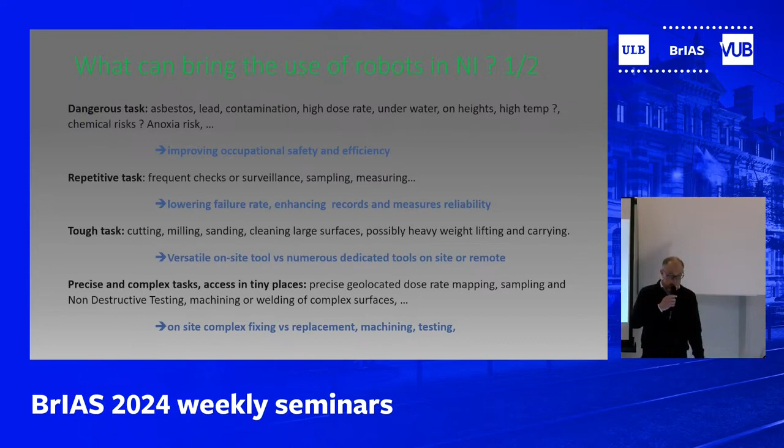Robotics is also a way to face the oncoming lack of resources. It's now quite difficult to find the workforce resources we need, and we know that in the future we'll be lacking resources. A key point could be to make jobs and companies more attractive, and having high tech like robots on board could do that. In some cases we won't find the staff, and we know that some tasks could easily be done by robots, so robots could replace staff companies can't recruit.

Robots have improved in recent years. They are now versatile, easier every day to program, and more affordable. Low code, no code solutions are coming, making it easy to fix or modify. This means a company can get a robot, adapt it, use it, adapt it again, and use it for another task. This helps companies be competitive and adaptive to the high demand in the nuclear area. On top of that, we have AI that will provide additional autonomous and adaptive performances and uses, which I won't develop here.

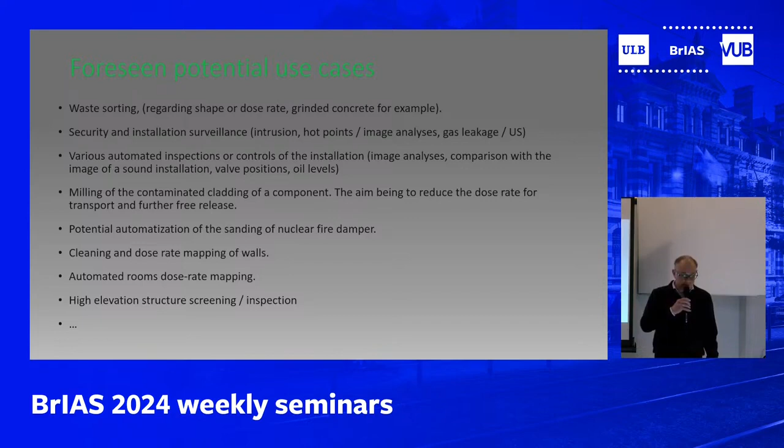This is all for me. If you have any questions, I will be happy to try to answer.

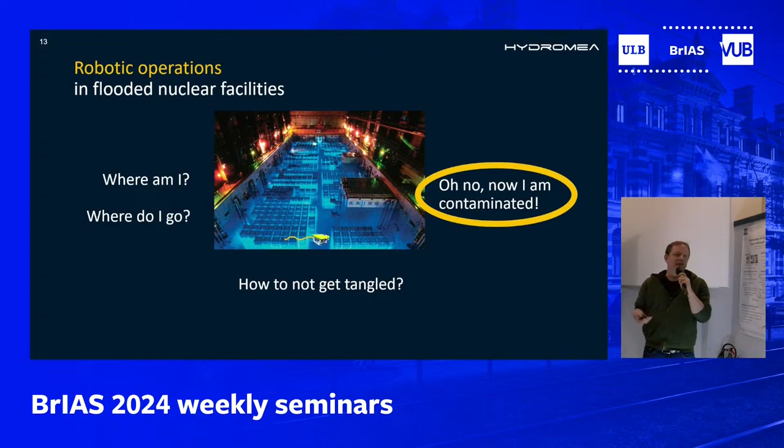So the second issue, how to avoid the decontamination. Well, there's a fairly straightforward approach to that. What if your robot just never leaves the water? Then you just never have to clean it up. And the very natural progression is that you give it an underwater garage in which it parks and recharges. We have actually developed this for an aquaculture project.

The idea is, within a net, within any of these large aquaculture nets that are more and more going offshore, you have a robot sitting inside that inspects the nets, inspects the fish for diseases, and the robot essentially just lives there and then comes back to the garage to recharge.

So for that, we actually did develop this parking solution. The nice thing nowadays is that things like inductive charging for underwater robots are sort of becoming an off-the-shelf product, so that is a mostly solved problem. The other nice thing is that you can offload data even faster than through the optical link. So a convenient thing to do then is some automatic docking.

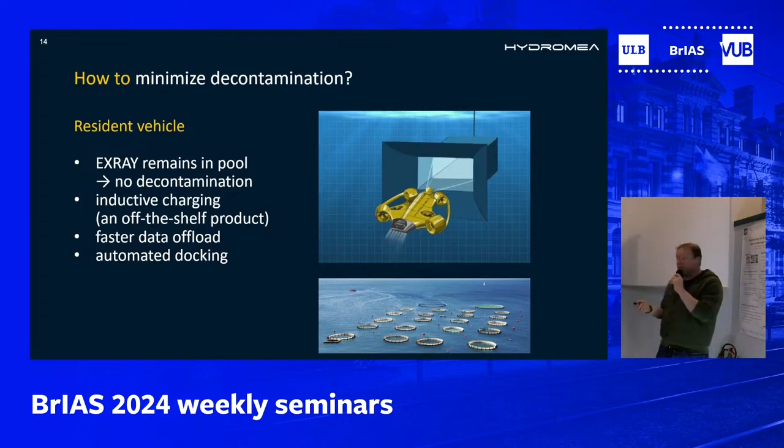Again, there are various academic projects around the world that work on automatic docking in all sorts of fashion, be it in space, on land, or underwater. But of course, we leverage research that has been done before, but ultimately we do have to implement it in our robot.

So what you see here on the left side is a mock garage, a cage that is in our pool. And what you see here is the video of the camera of the robot that looks at 4 fiducials. And from those fiducials, it tries to estimate its position relative to the garage. And you see its pose estimate in the lower right corner.

So if I start it now, here, it's not docking autonomously yet. Just my colleague is driving it around, just to see how well it can track its relative position with respect to the cage. Because once you do have your relative position to the cage, that is when you then start implementing any sort of auto-docking maneuvers. So that is something that is very much in development.

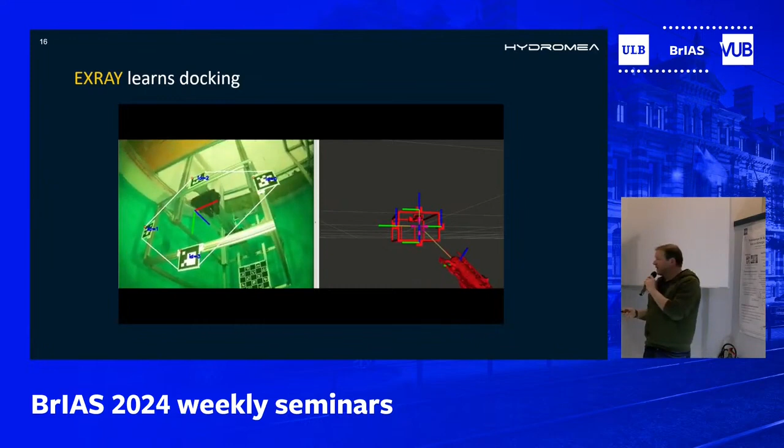And this also reflects a bit the course of our company. We did start in a fairly hardware-intense setup developing our robot, but the side of our company that now grows fastest is certainly the software side. So anything related to image processing, mapping, the SLAM as it's called, or just robotics software in general, that is actually the fastest growing, and that's where most of our time is invested.

And the last question, where am I and where do I need to go? So what is literally called SLAM, simultaneous localization and mapping, is key in a place like this, where the furniture, so to say, changes on a regular basis. So even if you had it all mapped out to begin with, this map doesn't help you much if stuff has been moved around. So you, as a robot moving in there, should constantly reassess the map, localize yourself, find out what has changed.

And there's an enormous body of academic work that has been done in that regard in the past 20 years, and I was involved in part of that. And we are now actually putting this to good use to come up with auto mapping capabilities of our robot. Because ultimately, our company started with AUVs. We now went to remotely operated inspection vehicles. But the ultimate goal is, of course, to come back to an autonomous inspection drone. The industry that we work in, oil and gas, or potentially nuclear, they are, for good reasons, very conservative.

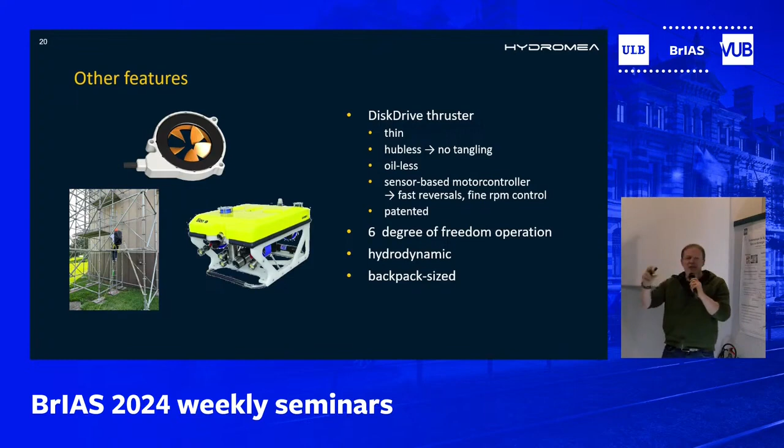Let's not forget, our competition — 95% of all other inspection robots literally look like this box. The standard thing: you have this frame, and you screw your stuff into the frame. This isn't some laboratory hack; these are multi-million-dollar products actually sold to you. It's very functional, but not particularly hydrodynamic. So for efficient, battery-efficient inspection, it's not very suitable. Things like having just a flat thruster make all the difference, because suddenly you get a much sleeker vehicle, and that's not just for the good looks — it reduces drag, reduces battery consumption, and extends range while keeping the size the same.

And of course, it ultimately makes for a backpack-sized vehicle if you carry it into more remote spaces. So that concludes my presentation.

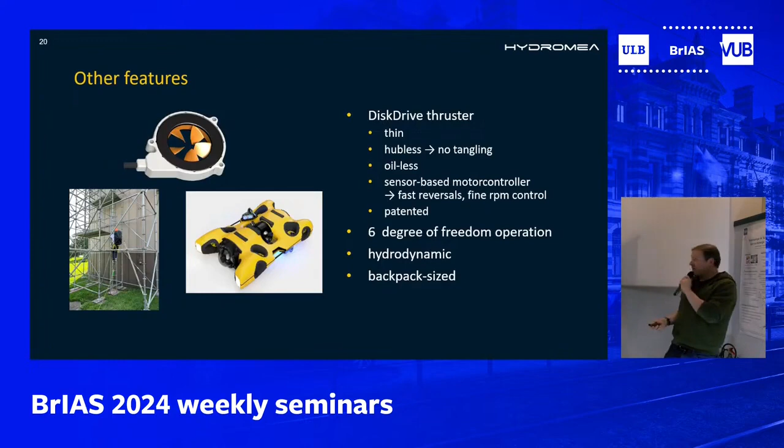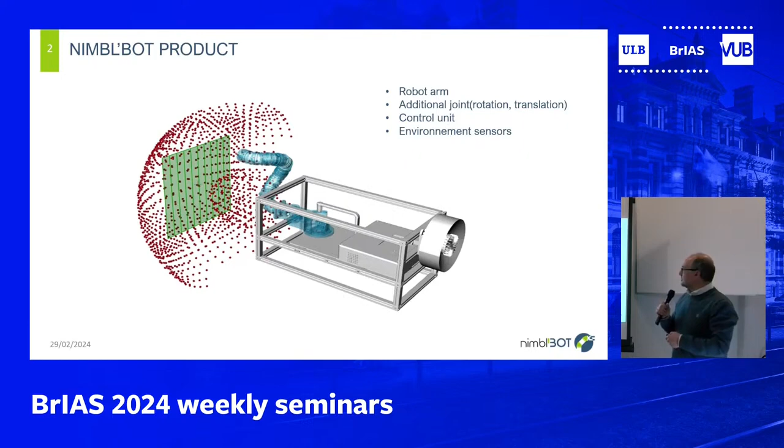Nimbl'bot is the contraction of two words, nimble and robot. That means we are producing agile robots for industry. Our robot is in blue in the picture. As you can see, there is an arm here with an added joint to increase the space of work, and we also have a control unit and sensors required to pilot and control the robot.

We design and manufacture a compact robotic arm to perform inspection and maintenance. Our design is based on a new architecture of actuators, which are more rigid, hollow, and torsion-free. This enables us, when we use this robot with a vector, to operate in environments with high constraint in space or hazardous conditions. We can do this operation because of the agility of the robot and its capacity to be easily piloted.

As we have discussed till now, we have a lot of questions about the safety of our infrastructure, especially because we have old infrastructure and we have to make more and more control on it. We have to increase the safety of the workers, and that means we need to find solutions to make more tests in conditions that we have not defined when we launched the design of the facilities.

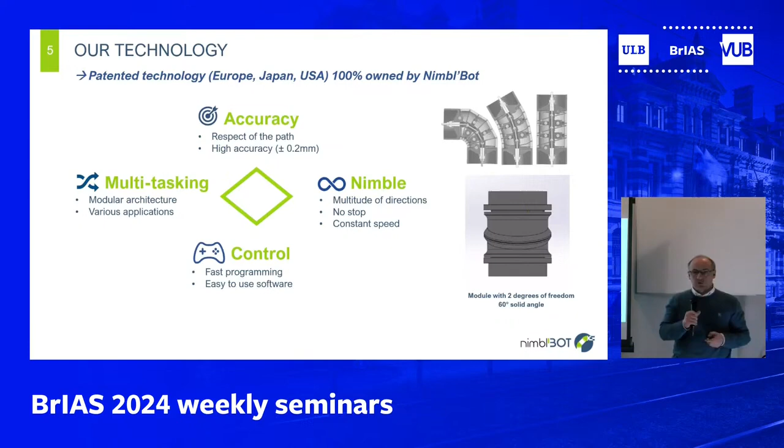We have also designed a lot of software to control these robots. To explain how it works, the technology is composed of a module with two degrees of freedom. The first one is a rotation from the green tube compared to the yellow platform, and the second one is the rotation of the blue tubes with the orange platform.

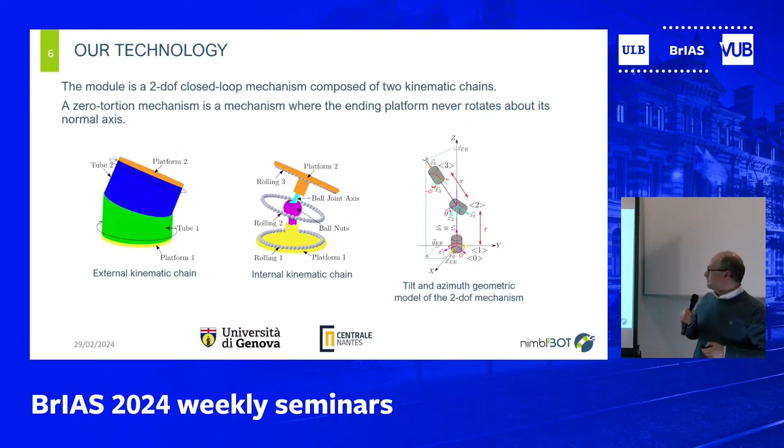It's a closed loop mechanism. That means we have an internal kinematic chain inside with a ball nut, which gives the property of no torsion. We can modelize our robot with a tilt-azimuth geometric model with two degrees of freedom. The space of work of this robot is part of a sphere, and we have two singularities, one in the center of this area and one at the border.

We have also something special: in the joint space area, we have two aspects which enable us to have the same space of work. When we use a lot of modules, we obtain a redundant mechanism. This offers opportunities for us, like obstacle avoidance. We can work in confined areas, and we can share space for two robots in parallel.

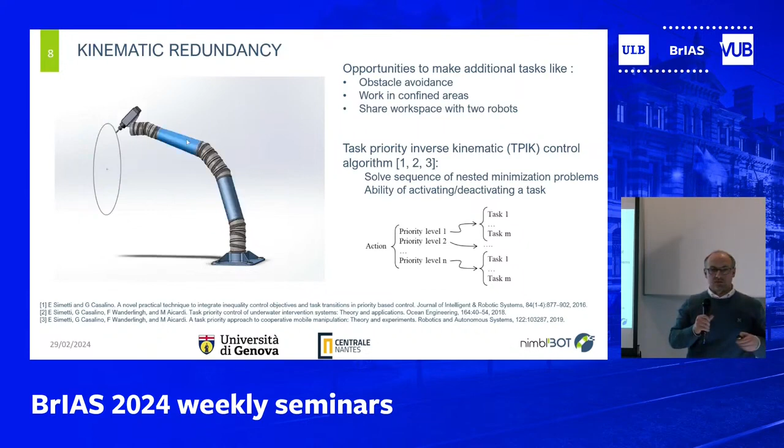To control these robots, we have developed an algorithm based on task priority inverse kinematic control. This work has been done with the DIBRIS department from University of Genoa and Centrale Nantes. The TPIK algorithm works with actions defined by different tasks, and for each task we define a priority. It's an optimization problem to obtain the good solution for the robots.

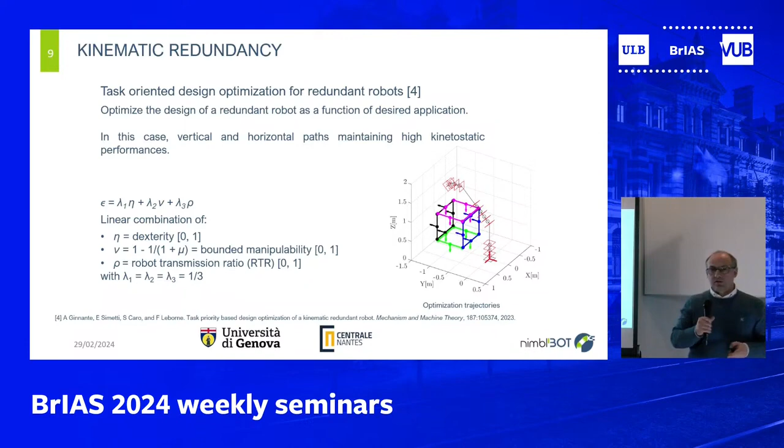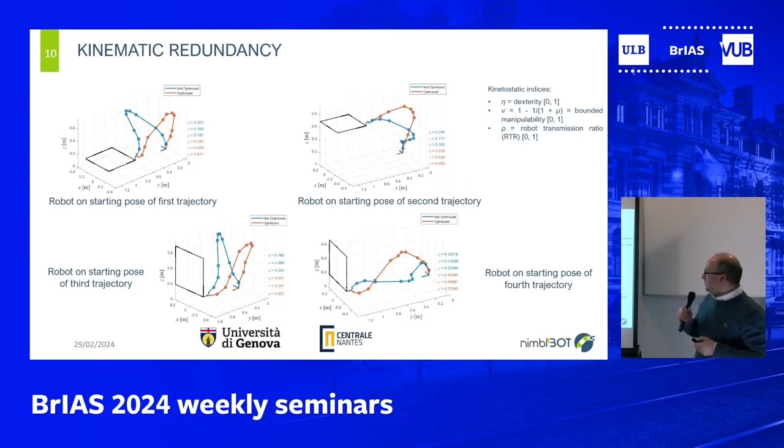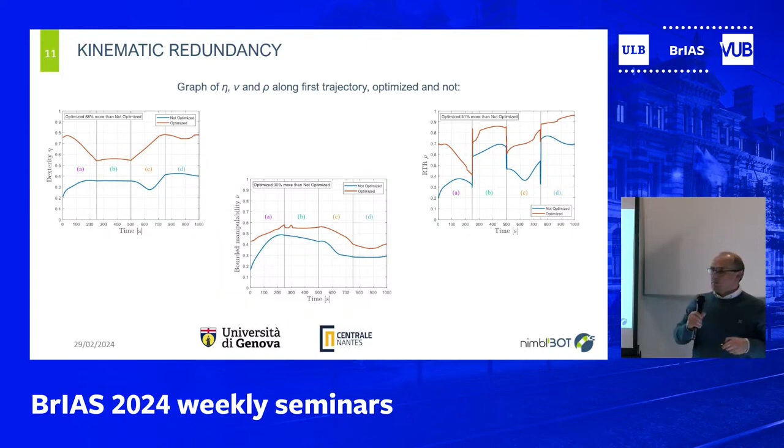We can also add other constraints, meaning we can optimize the shape of the robots by introducing parameters for the size of the robot. For example, when we want to follow the border of a cube, we can optimize the robot using three parameters: dexterity, manipulability, and the robot transmission ratio. The result we obtain shows in red the optimized shape of the robot, and in blue the standard, initial shape of the robot. We can see in that picture the gain we obtain in manipulability or dexterity by modifying the shape of the robot to perform the same task.

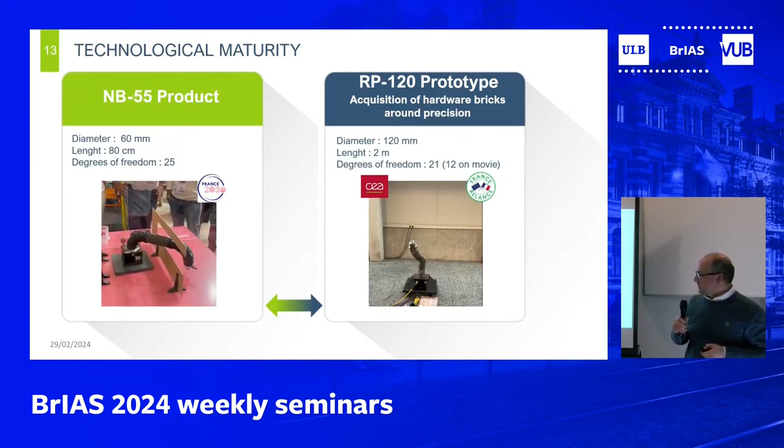For the hardware side of the robot, we have designed two products for inspection and maintenance. The robot for inspection is the NB55, 60 millimeters in diameter, 80 centimeters long. In the demonstration, we can introduce the robot inside the window and place the camera to make a straight line beside an obstacle. That kind of movement cannot be easily made with another kind of robot.

In the second step, we are working on a bigger robot with exactly the same design and algorithm. It's just heavier hardware to perform maintenance tasks. It's the prototype version, and we are carrying on working on it.

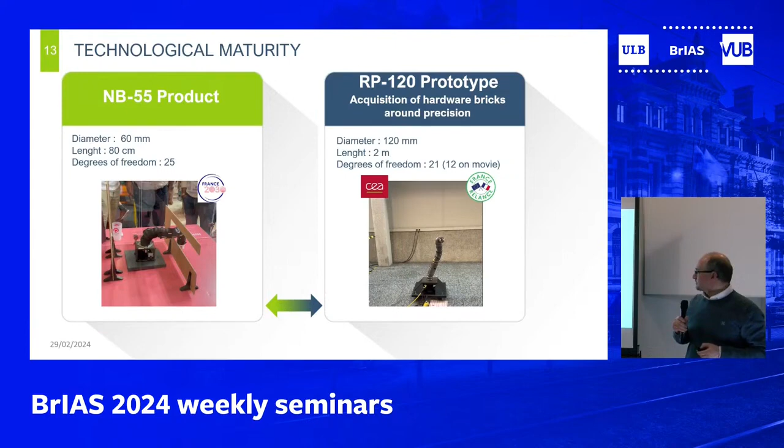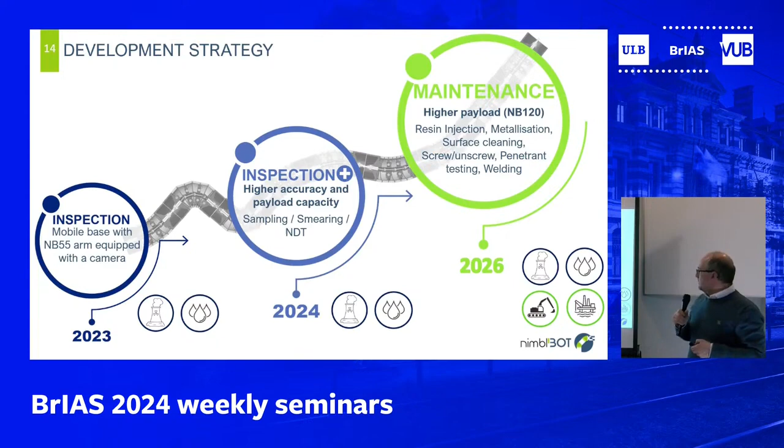Our development starts from the small robot. We are doing inspection with camera at the moment, and little by little we are implementing new features. We are implementing NDT control, and we are working on a gripper to pick parts with the small robots. The bigger robot for maintenance is scheduled for two years later.

Our robot is light compared to others. It can be used for mobile or fixed applications, and we can easily connect the robot with different actuators and effectors, because all the development is made with ROS.

We have two other ways to control the robot, specifically designed for inspection and NDT. The first one uses Cartesian control, as you can see on that movie.

On that movie, the additional joint is a rotation. We have defined in the space a path for the end effector of the robot. The robot will go to the beginning of this path, and after that the camera will follow the path we have programmed. The objective here is to make a check of weld on a pipe.

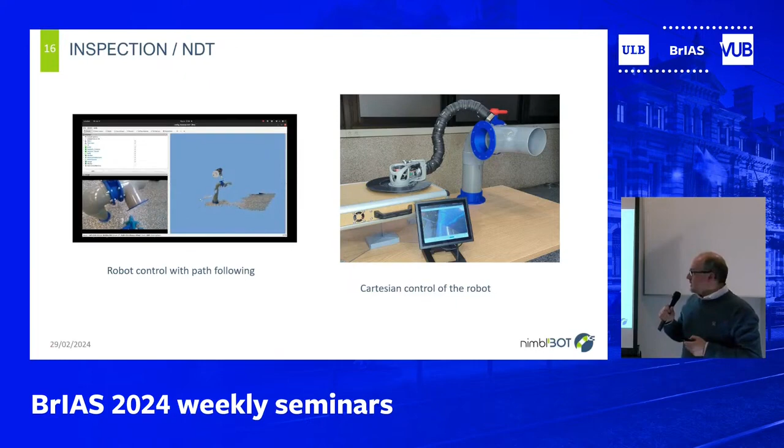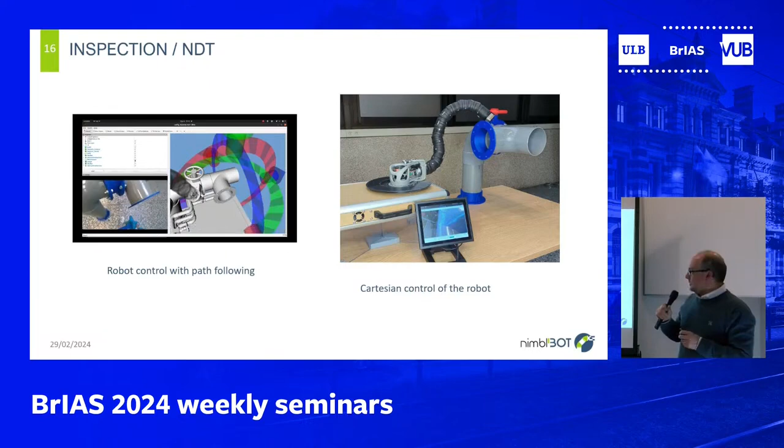The camera is RGBD, meaning we have point cloud acquisition. This enables us to introduce the CAD model of the installation and move it to fit with the point cloud. As soon as we have sufficient localization of the point cloud against the CAD model, we can work with the CAD model to follow the path and avoid obstacles existing in the area, obstacles we cannot see with the camera.

Oh, thank you. Not yet, my microphone. Okay. Yes, we do.

Thank you very much, Ludovic, that was really interesting. One thing that struck me is that you have many joints or moving parts, so intuitively that would increase the risk of one of them getting stuck.

But then, as that crossed my head, you started talking about kinematic redundancy. Is that something you explored in one of your scenarios? If one of the joints is blocked, can we still perform the task, and how efficiently can we do it?

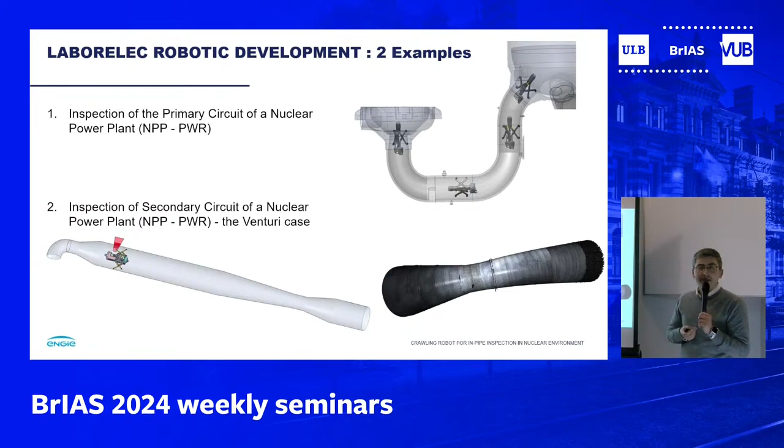Let me give you two examples of our activities. The first is an inspection of the primary circuit in a nuclear power plant - we are talking about PWR. The second is for the secondary circuit, and that's what I call the Venturi case. I will also try to address a few points already touched on today, and give my personal feeling, for instance, on the amount of documentation needed for such interventions. First, for those working in the nuclear sector, they might recognize the primary circuit - it looks something like this.

The mission that was given to us was to design a robot which was able to do the inspection of the primary loop, not a full primary loop, but part of it, to also do operations - grinding, cleaning, radiography, NDT testing, ultrasonic, particle PT testing - and to do it in an environment which is the primary circuit. So we are talking about a highly contaminated environment. The primary circuit is really the pipe that goes around the reactor.

So here you see the design. That's the steam generator, the primary pump. Those were the two points of access for the primary circuit.

Normally, from the steam generator, you have what is called the manhole. It's about 450 millimeters in diameter, but the primary circuit itself goes up to 800 millimeters. These are big pipes.

The capability of moving a robot which has not only to do inspection, but also to do operations in elbows like these, and also the capability to inspect and report with precision for the NDT in the region of 1 millimeter - so here, these are more or less the summary of the requirements.

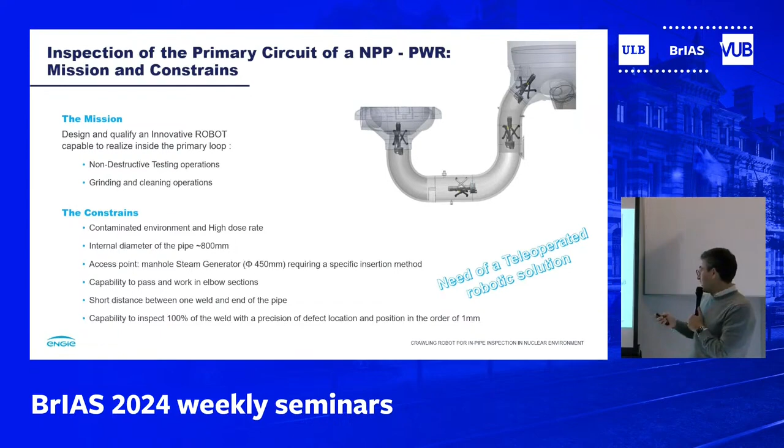Then we come up with this solution, this proposition. Just to be clear, we do not produce robots, but we are more an integrator of solutions, the best available on the market. We participate in this step: the conception phase, the development, the qualification, and the trainings if needed.

For this project, for instance, it was needed. The conception phase is really the phase where we go to the requirements, to the possible solutions on the market, nuclear or non-nuclear, everything which is available. What has to be co-designed, maybe with partners, we do it.

And then there is the development phase. We also do all the development tests, so the factory acceptance test of the robot, the development tests that need to be done in order to fulfill the requirements of the power plant.

And in this particular application, if I go back to the requirements in terms of documents, the qualification phase is huge. So here you need to account maybe 6 months of qualification for a robot like this. And then there is the training of the operators.

Now, if I go back to the difference between nuclear and non-nuclear robots, the high dose - it doesn't impact the robot itself. The problem is that when you need to inspect and do NDT and radiography, this is the big issue.

The radiographic module - the robot was conceived in order to have a main crawling system with different modules, and there was one module dedicated to radiography. Then you need to protect the robot itself, to harden the system in order to be able to withstand these types of activities, the radiographic testing. The source is so powerful that it can destroy everything. So it was designed actually for the dose given by this inspection, not for the high dose of the pipe, of the circuit.

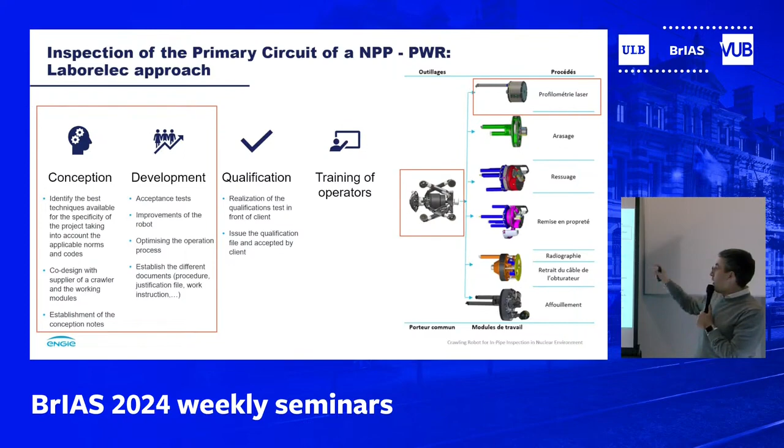So the project is huge, so I will only concentrate on a few topics today: conception and development on one module, the profilometry, laser profilometry module.

So this is a bit how it looks like in reality. So it's a module - the idea was, okay, we have one crawling system, it goes in and out, then we only remove the front part and we adapt it for the different types of inspection.

The laser profilometry module was designed by me. This was my module, that's why I selected it, together with a contractor. It's a module that has 2 cameras, radial cameras, one front camera for navigation, and then there is a laser for laser triangulation.

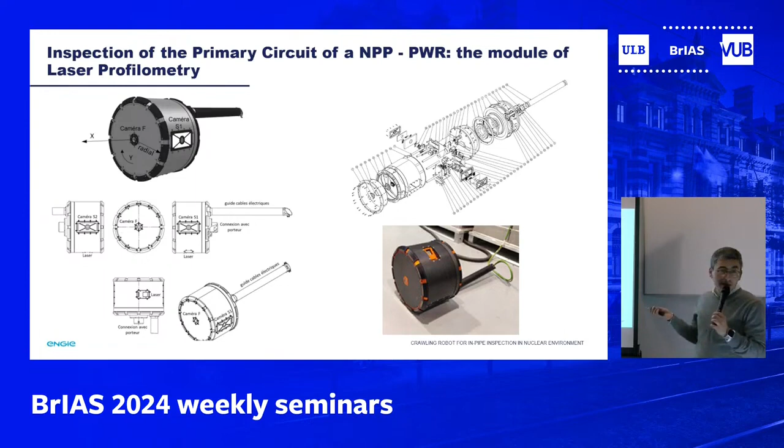So that's a bit of the design phase. This is the list of parts and materials that has to be checked in order to be compliant. That's for one module.

I'll also give you more detail of the technology used in this case. The requirement was to inspect the welds, which are done automatically with the robot. After welding, you need to inspect the root penetration. If there is any lack of fusion, we had to grind the root penetration and re-inspect the pipe and weld to make sure we didn't grind too much, since we didn't want to remove too much material because the wall thickness is defined. So we had to check that.

How we did it with this module was laser profilometry, a laser triangulation technique. If you have a laser beam like this, you can measure normally in this range. Here's the schematic, depending on the positioning of the robot inside the pipe and the diameter of the pipe. You can measure the distance between the internal wall and the system, with a repeatability of 100 microns with this system. You can go lower if needed, but in this case it was enough.

And then you have the camera. These systems are synchronized together. You might have noticed in the previous slides that they are physically not looking at the same location—they are in a configuration 90 degrees from one another. But at the end, there is software that synchronizes everything, images and laser profiles, laser clouds, in order to give one output.

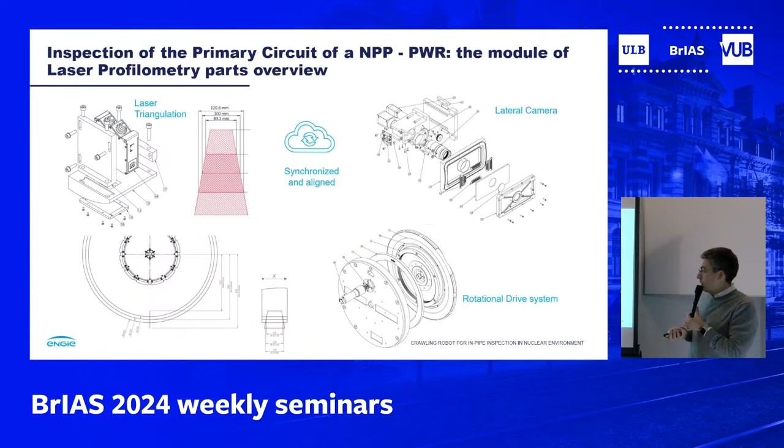At the end, what you need to estimate is how the welding was, whether it was okay or not, and whether there's any lack of penetration. Then after you grind it, you also have to estimate how much material has been removed. That was one of the requirements for the module.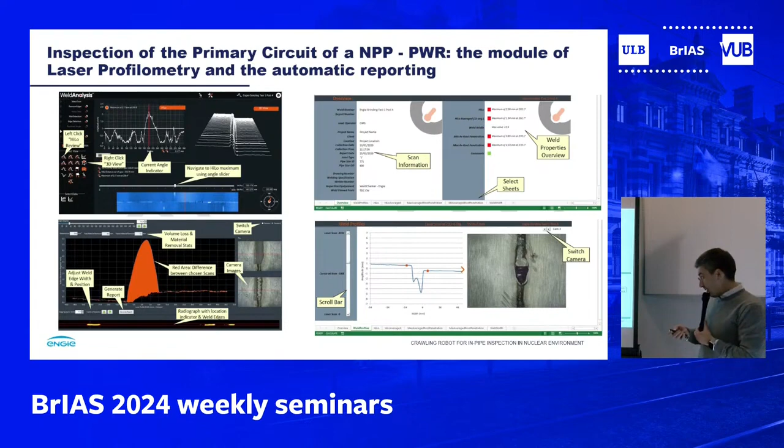This was a big project with a lot of development and qualification, not only for the mechanical part but also for the software—you need to prove that the software is also reliable. In this case, we also decided to go together with our partner for automatic reporting, so the report is automatically generated at the end of each inspection. That's an example of a big project.

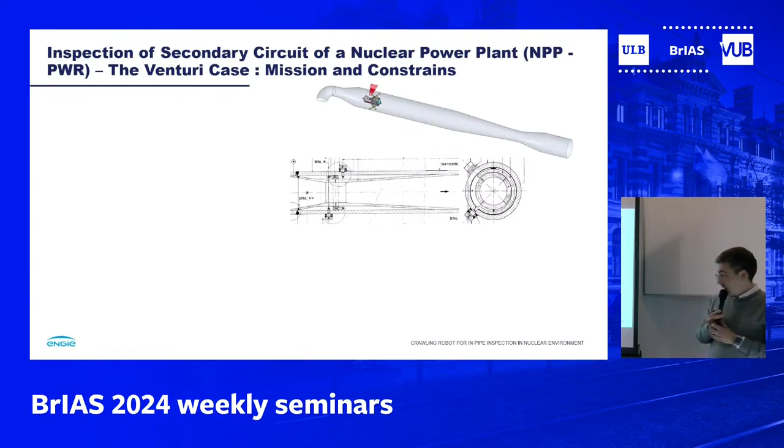And now I'll go to a different topic: the inspection of the Venturi pipe in a nuclear power plant, but on the secondary circuit. In this case, we are not talking about a contaminated pipe—the environment is not radiating, you can stay there. But the pipe looks something like this, a Venturi system. I'll put up the requirements and then explain.

In reality, the Venturi is a convergent-divergent pipe, which is a pipe inside another pipe. To access it, you have some tubes around it—it's used as a flow meter. With this device, you can measure the flow, and with the flow and pressure controls, you get an idea of the power produced by the reactor.

The problem in this case was a drift of pressure, which you could actually regulate by adjusting the power and the flux to solve the issue. But during the shutdown, we were asked what's the cause. They were thinking about possible erosion - if you have erosion in this area, then the flux changes and you have a drift, or any leakages that could happen.

We are talking about problems with the insertion point. It was a valve, very small, 208 millimeters, then the pipe went up to 400 millimeters. The pipe of the Venturi is not a cylindrical pipe, it's a convergent divergent pipe, so the manipulation was a bit more tricky. We wanted to evaluate the possible erosion compared to the CAD using laser scanning.

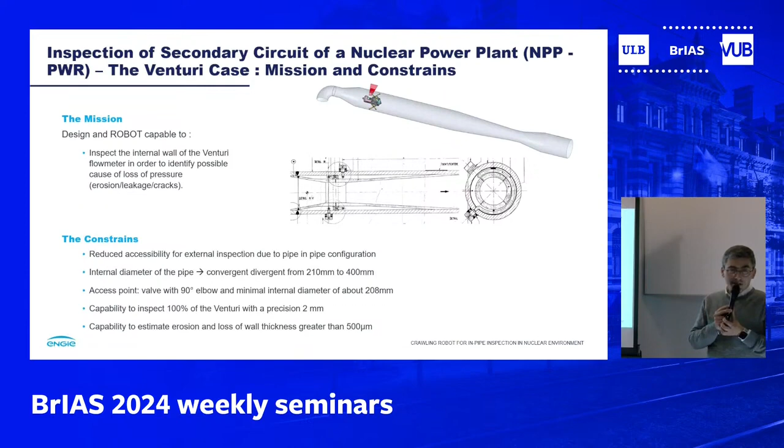Profilometry with a resolution of more or less 500 microns. The problem again with the CAD comparison is that the CAD is the CAD, but the as-built is something different, so you will probably see later on.

So again, this was teleoperated, but in this case, having a robot teleoperated remotely was not given by any need for contamination or radiation protection. We could stand close to the Venturi, but this is how the Venturi looks like - it's a pipe, and inside this pipe there is the Venturi. If you want to dismount everything and change it, it costs more or less €1 million.

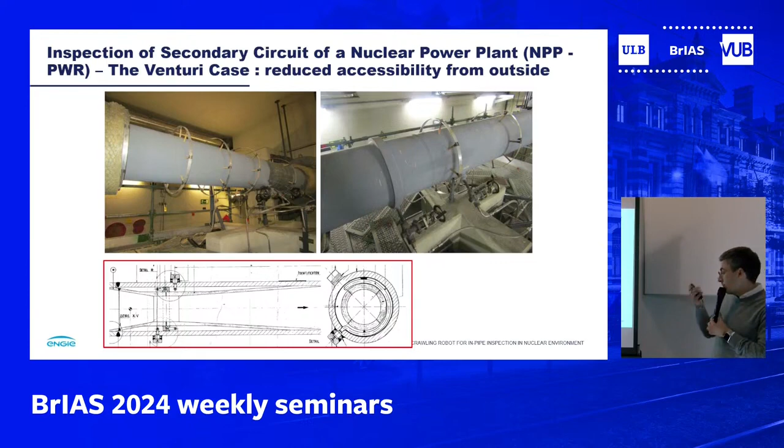There was only one area we tried to inspect from the outside with ultrasonic, but in the end we were not able to get all the required information. The Venturi is more or less 6 meters in length.

There was also another very important constraint. We were contacted at the end of January, and we knew that the robot and inspection had to happen at the end of October, so this was non-negotiable. When you have something like this, you make a plan: 5 months for development, then you need to do some tests, 3 months for production, and then some tests before going on site.

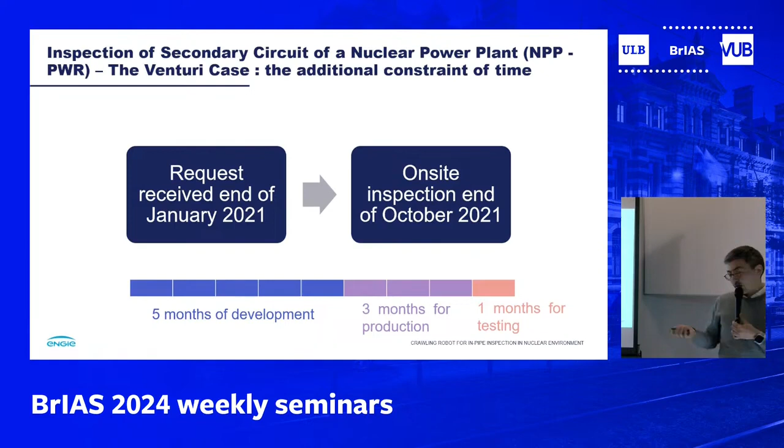Again the phases of how we work were more or less the same approach, but in this case there was no need for qualification, and also no time for qualification. We did the inspection - I did it myself in this case, so no training was involved.

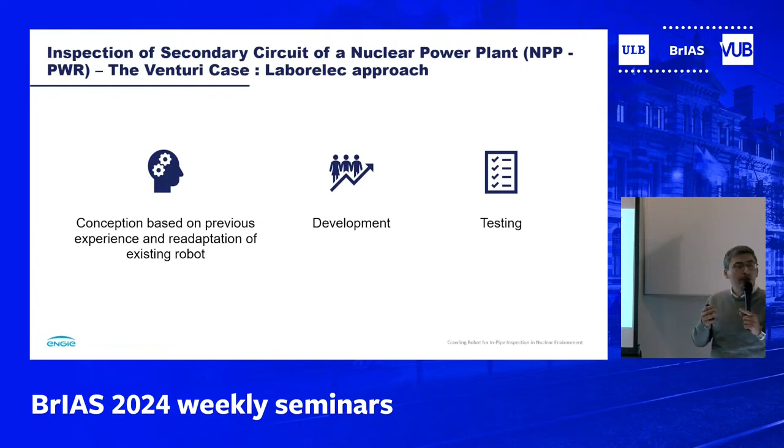But for the conception and development phase, since the time frame was very short, we started from something already existing, from prior experience, modified it, and made it - I would say not fully robotized, you will see - but almost completely robotized. Some parts were robotized, other parts were in a push-pull system configuration. So we came up with something like this.

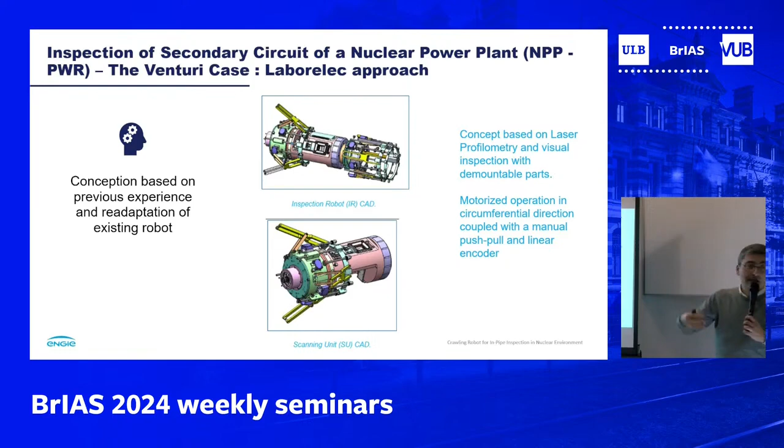Basically it's the same module you've seen before for the big project on the primary circuit, but reduced in size - here we're talking about diameters of 200 millimeters. It's also demountable because you need to insert it inside a valve, so the parts can be removed and then mounted once it's inside the pipe. So that's a bit of the development we did.

This is the robot. Then we did tests of the different configurations - you see that you can remove only the front part and insert it in the valve. Then once in, you put the wheel system in, and it can circulate inside the system for 6 meters up to the point of inspection.

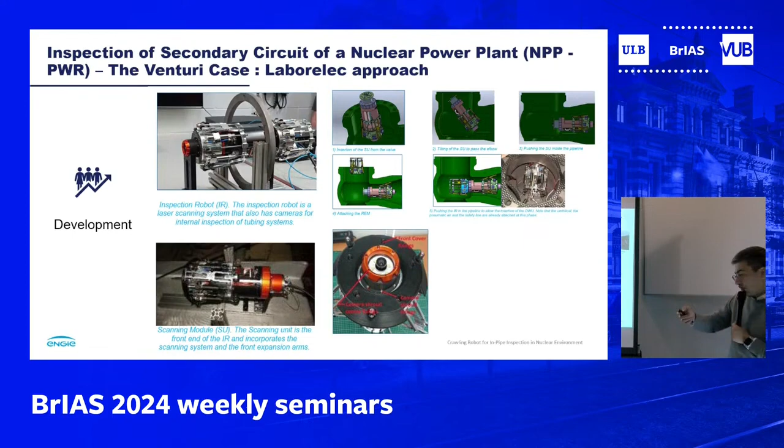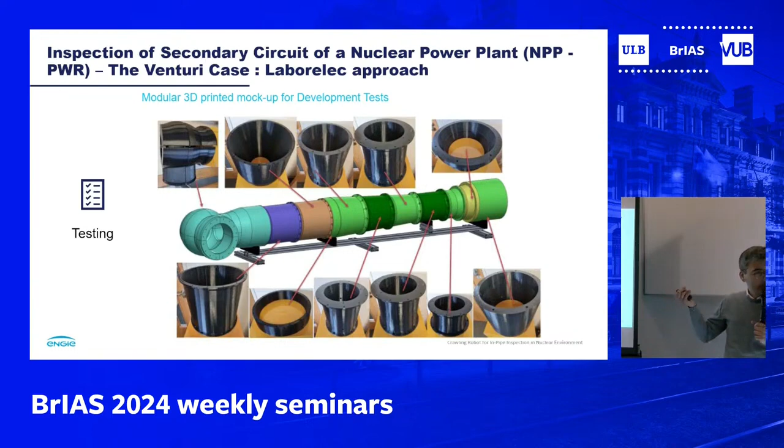The test followed a very pragmatic approach. In this case we didn't have requirements to prove it on the same material, so we 3D printed the mock-up, in polymer, with different sections that could be mounted one with the other. The most critical section is of course the Venturi mid section, because that's the point where erosion can occur. We tested here, and then did the inspection of the full Venturi.

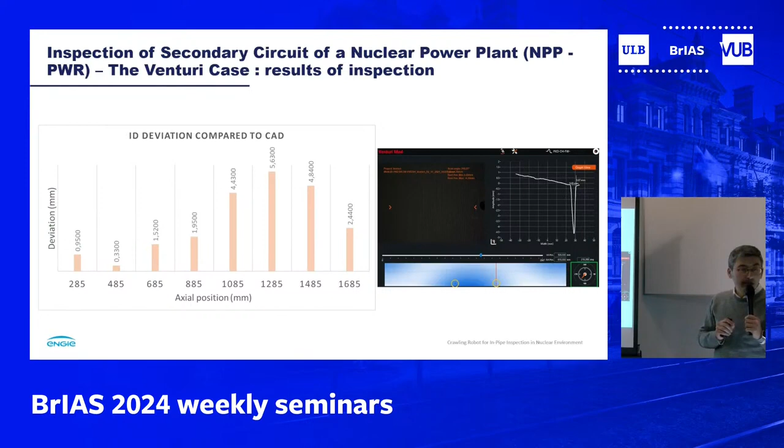With comparison to the CAD, the main number we were interested in is this one, because it's the mid section which is driving the drift. There was a 330 micron difference with the CAD, meaning there's actually a real difference, since the as-built could vary. In any case, even 4 millimeters in the mid section would not have explained the problem, so we were far from that conclusion. You can also get a full 3D visualization from the system.

Here you might not see very well on the screen. This is a combination of laser points and images, stitched together in one single output. And then you have the difference. So the cause in this case was something else, which we were able to detect, but it was not due to erosion. It was an additional inspection that we had to do, and we found the cause—it was a leakage somewhere, but no erosion.

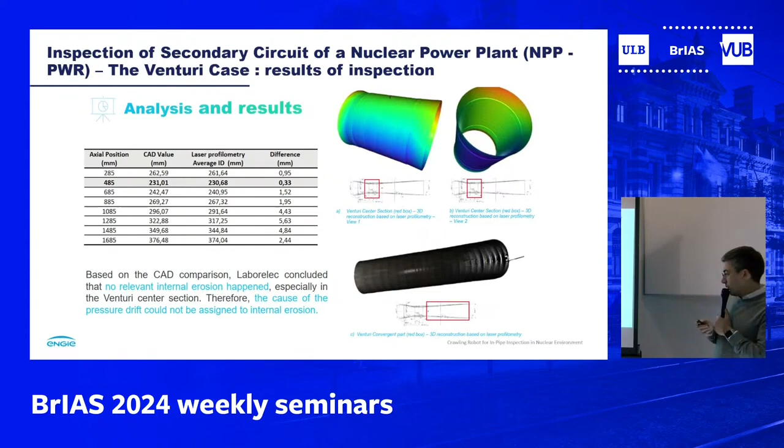So I made a brief summary of why we use robots in nuclear. Of course, if it's a contaminated area, highly irradiating area, high dose, then you cannot enter the area. You need a robot. It decreases the risk that the operator takes. It also gives the possibility of having digital data, highly reliable data, high accuracy and precision.

The robot is able to give a precision in terms of positioning of plus minus 1 millimeter, and the repeatability of the laser of 100 microns. So these are very reliable and precise measurements.

And of course, as you've seen here, I have only shown two techniques, laser profilometry combined with visual inspection, but there is the possibility to combine multiple technologies like ultrasonic or any other type of NDT testing in a single unit, and then to combine the data together. This makes it faster, reliable, and of course less risky for the people working in the power plant.

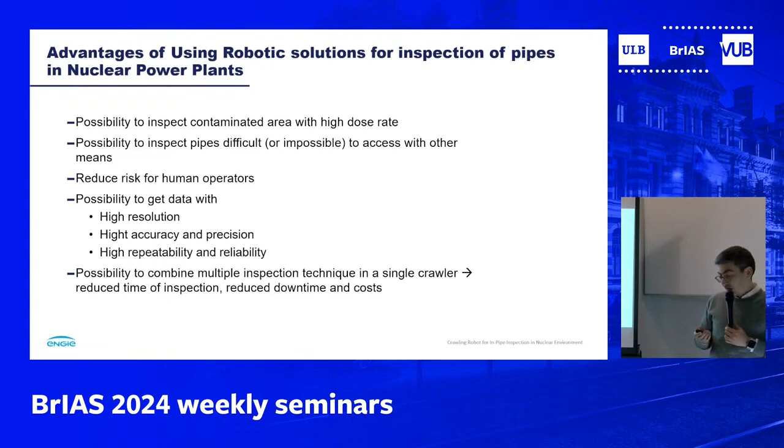That's it from my side. If you have questions, I'll try to answer. Okay, thank you.

Many thanks, Alfredo, that was really interesting. I would have two quick questions. The first one would be, how many operational deployments have you had so far? I'm especially thinking about the first deployment that you showed. There is quite a bit of work with the mock-up and everything, but I assume that once it's done, you can really replicate it a lot.

Yes, there we don't do the inspection. For the first one, we train the operators. Then we are only available if there is a technical problem, remotely or even on site, but we are not doing the inspection ourselves. And in that case, it's not a single robot—I think it was two or three robots for a parallel inspection on different sites.

For the Venturi, I did one inspection. There is interest in doing other inspections in Europe, but for the moment, this was the first type of inspection ever done on the Venturi in the world with this technology. So before it was not inspected.

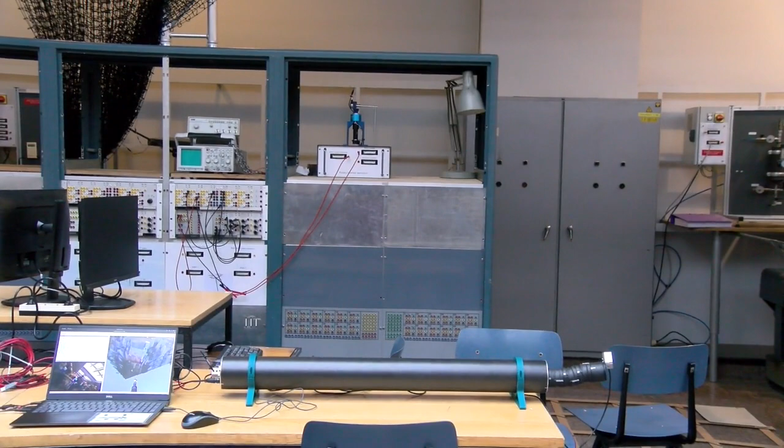At the moment, all the system - the black tubes, carbon tubes, and the robot - weighs 5 kilograms. That means it can be easily placed on a rover, or something else, to be introduced into a confined area. The way to control it is just to change the orientation of the head of the robot. Now it's straight. I will move the head and push the robot, and it will follow - it will go up. I increase the curvature and the robot will follow the curvature I've done with the head.

Now with just one, I will go straight. And with the camera, we have a feedback of the environment we can see. The obstacles are too far - the distance of vision of the camera is less than 5 meters, so that means we cannot see very far.

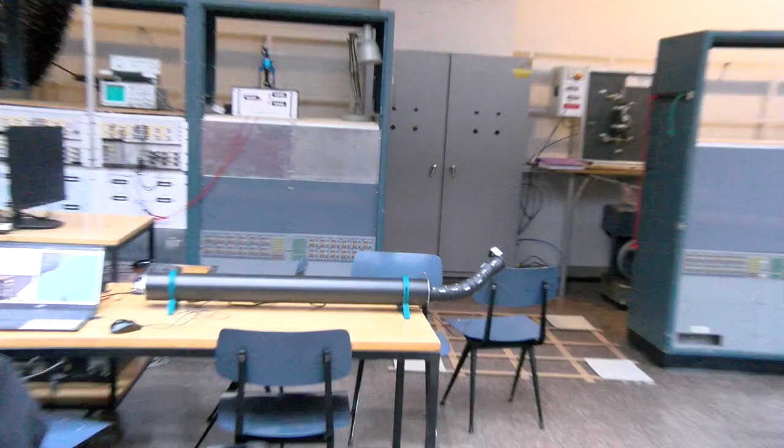Okay, does someone want to test? We can break everything, but yes, of course - just this button to go back, go front. Okay, why is it moving? Because it's straight, the head is straight, but we are in the singularity. If you change the orientation of the head, up... now it is stabilized.

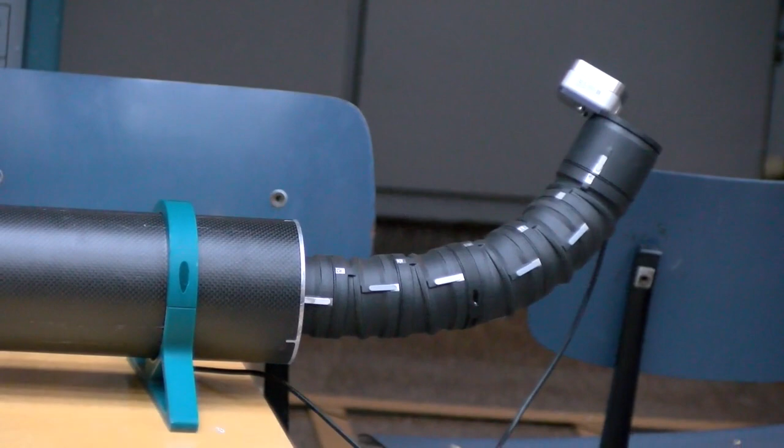This is okay, and then if backwards, yes, in the opposite, the button will go. No, this way. Yes, what? Where do you want to go? I don't know, I'm just pressing and seeing. Yes, this one - yeah, you go outside. What if it falls out? It will follow the orientation of the head of the robot. Okay, but it cannot fall out. More? Yes, okay. Yes, the robot moves and goes out now. And I can rotate the head? Yes, this one. No. Okay, nice. Thank you.